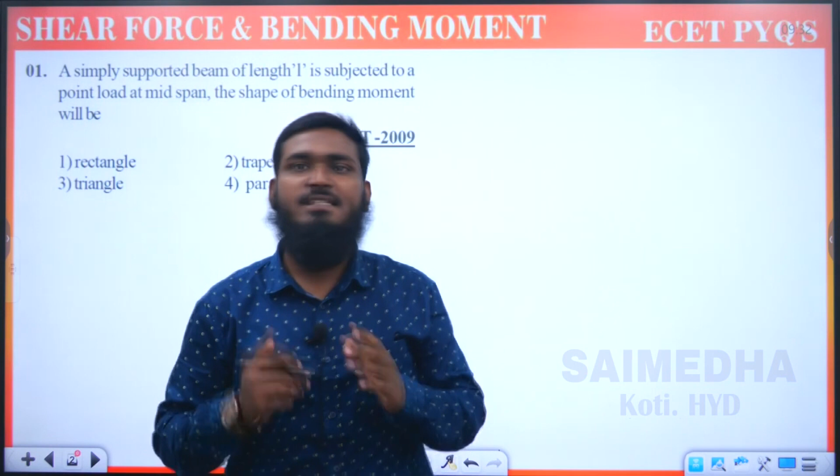In this video, we are going to discuss the previous ECET questions on the topic shear force and bending moment. This is the second chapter we have taken. Whatever questions have been asked till now in the ECET examinations on shear force and bending moment, we have to cover all these questions here.

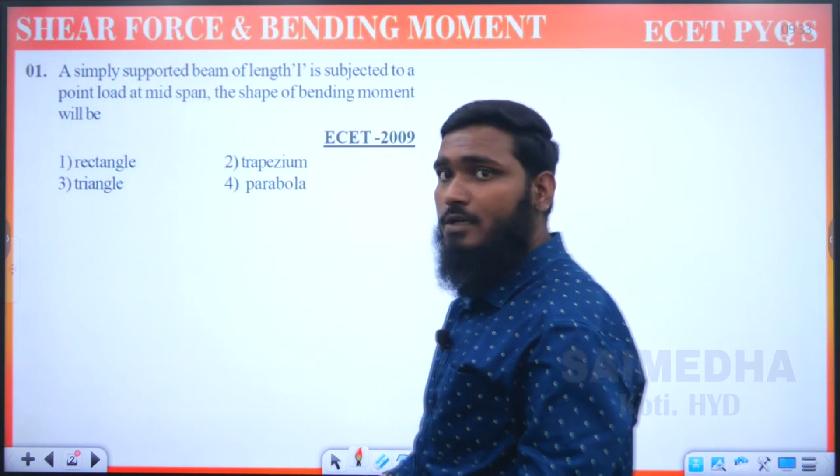Now let us see the first question. A simply supported beam of length L is subjected to a point load at mid span. The shape of the bending moment will be. Now let us see this part.

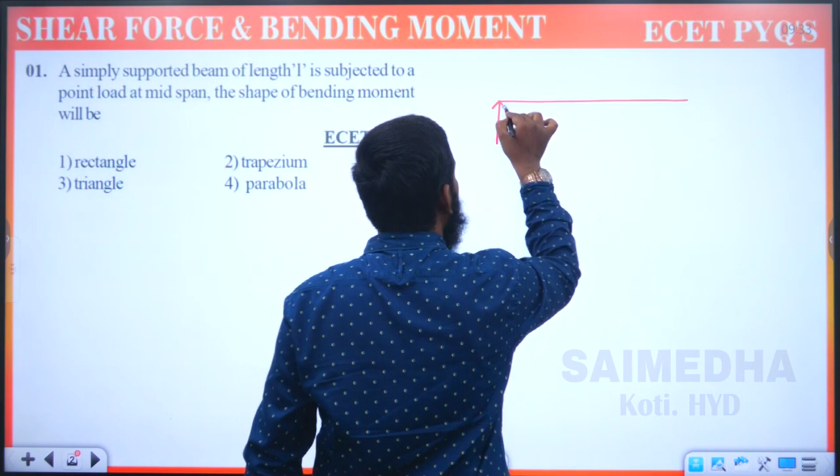What we are having first here is a simply supported beam. If you are taking a simply supported beam, let us take this part. This is the simply supported beam we have taken. What is the meaning of simply supported beam actually? Whenever the beam is having two supports at its ends, we are calling it a simply supported beam. So a simply supported beam of length L.

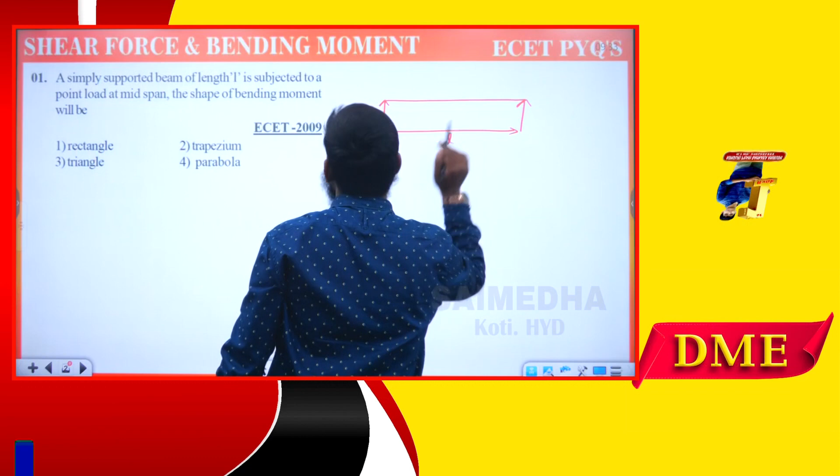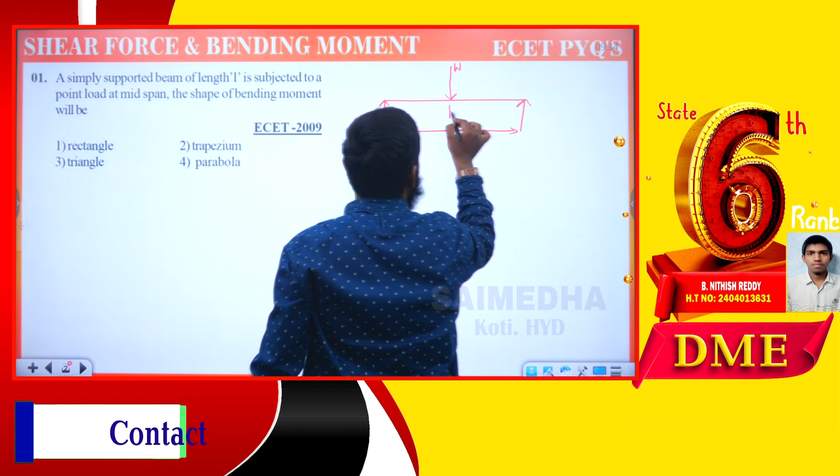So this complete length we have taken as L. It is subjected to a point load at mid span. So at the midpoint we are having the point load. Let us take it as a point load here and mention this as W. At mid span we have taken, mid span means this length we are taking as L by 2, and again this length we have taken as L by 2.

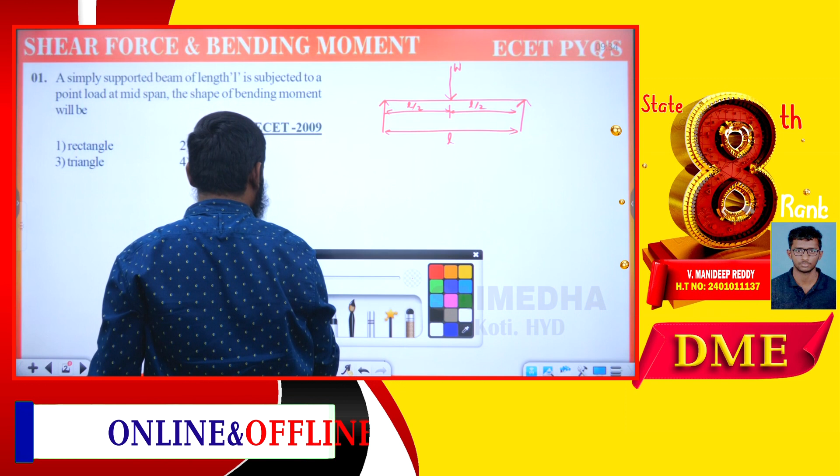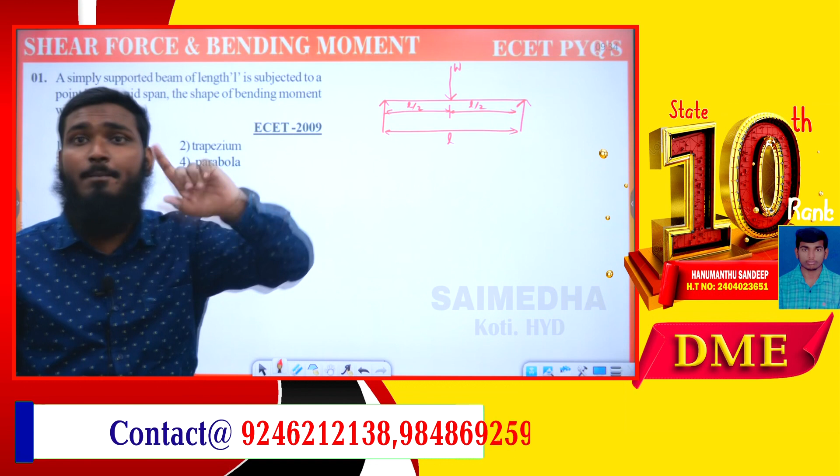Now let us see the next point: the shape of bending moment will be. So for these questions, these are standard questions actually. So compulsorily what you have to do is, I'll explain how we are getting that shape, but after that you have to remember directly what shapes we are getting for this part.

For standard conditions, if you take cantilever beam with point load, cantilever beam with UDL, cantilever beam with UVL - but maximum questions will be from point load and UDL itself. Similarly, simply supported beam whenever we have point load at mid span, and similarly simply supported beam with UDL. So these are the standard questions we are having. We have to directly remember the diagrams, how we are getting them.

Now let us see this part. This point load at the midpoint we have taken as W, and let us take this part as RA, and this is RB.

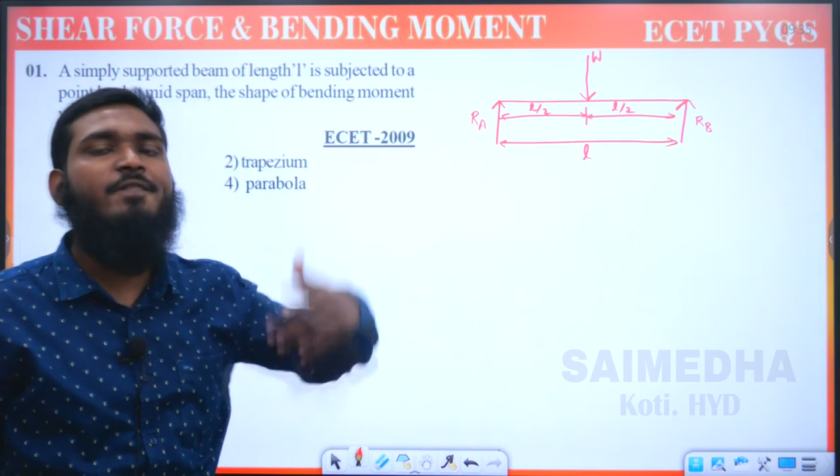Okay, so we are having the reactions over here. Whenever we are having the supports, what are we calling it? A reaction, RA, RB. Now first let us find out what is RA value and RB value, then we have to go for shear force and bending moment. So first, what we are taking over here, our first step is...

Now whatever forces we are having over here, algebraic sum of all the forces equals to zero. So we are taking this part: upward forces equals to downward forces.

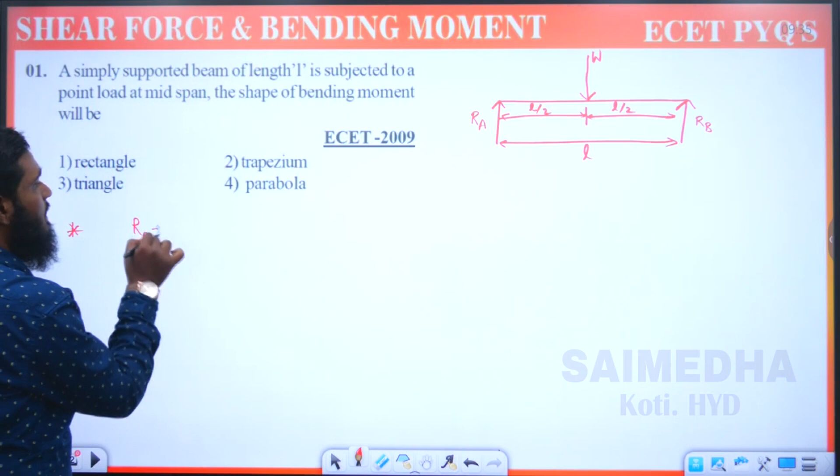So what we are having, RA, RB we can take over here, and W we can take. So the first condition we are taking is RA plus RB equals to W. This is the first equation we are making over here.

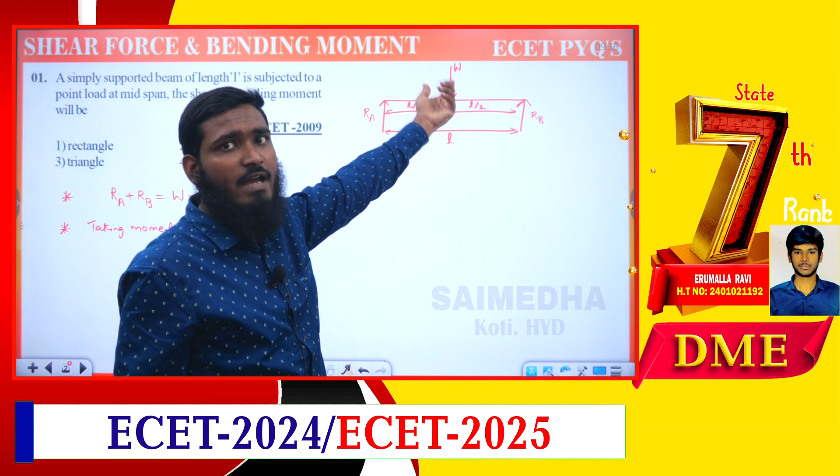Now next, what we are taking is moments. We are taking moments at point A. So whenever we are taking moments at point A over here, moment means what? Force means load, whatever we are having, force or load, and we have to take the perpendicular distance. Like that we have to calculate over here.

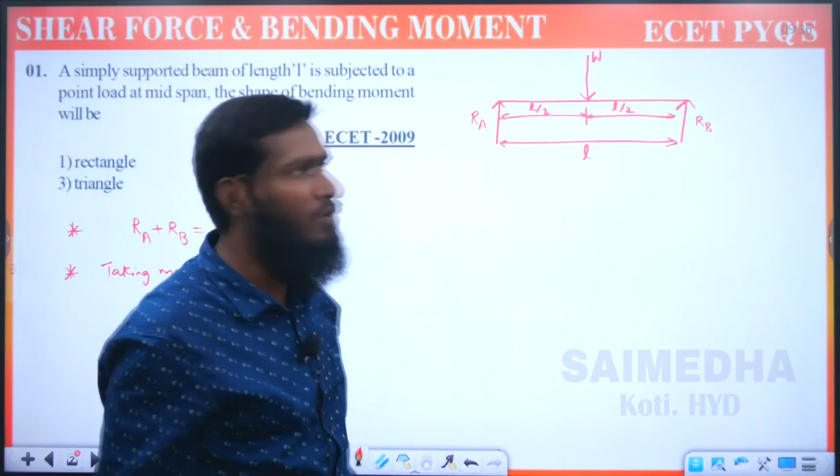So whenever we are taking this point, now we have to take clockwise moments and anti-clockwise moments. So what is clockwise and what is anti-clockwise moments over here? If you are taking this point over here and we are taking this reaction, it is looking like what? Clockwise or anti-clockwise? This is becoming clockwise, and this part it is becoming anti-clockwise.

So now let us take this part as clockwise moments, it equals to anti-clockwise moments. So we are taking this part as RB into, this is the force, load we have taken. What is the perpendicular distance we are having up to point A? L. So RB into L, which is equals to...

Now next we have to take this part, clockwise we have to take over here. So W we are having, and the distance we are having up to point A is L by 2. So let us take this part as W into L by 2.

Now what will happen? This L gets cancelled. What is the RB value we are getting over here? RB is equals to W by 2. So RB value is equals to W by 2.

Now with the help of this RB value we can find out the RA value also. So if you are substituting, RA plus RB equals W, sending RB over there means minus RB, which is W by 2. So RA equals W minus W by 2, which gives RA equals W by 2.

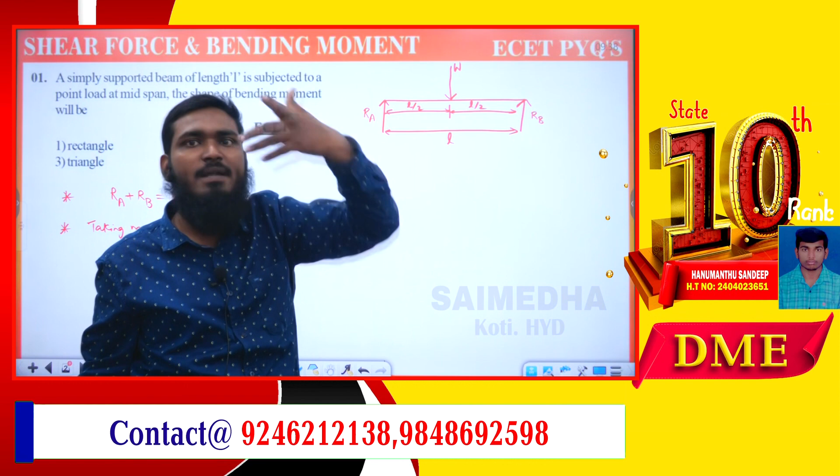What is the shortcut we are having? Whenever we are having symmetrical loading, meaning the point load is acting at the middle of that part, mid span, so whenever it is acting at mid span, what we can do is directly take this part.

RA is equals to, what is the load we are having over here? Load is equal to W. So W by 2, and RB is equals to W by 2. Directly we can write over there, no need to go for all these calculations. Whenever we are having this point load, whatever the value will be, that value we have to divide by 2 to get the RA value and RB value.

Okay, so this part is completed. Now after this, what we have to do is find out shear force and bending moment values. What we have to calculate is shear force values and bending moment values. So first let us go for shear force over here.

So first let us go for shear force. Now shear force means, how many points are we having over here? Point A, point B, and let us take this part as C. So A, B, C, 3 points we are having. First let us go with the shear force at point B.

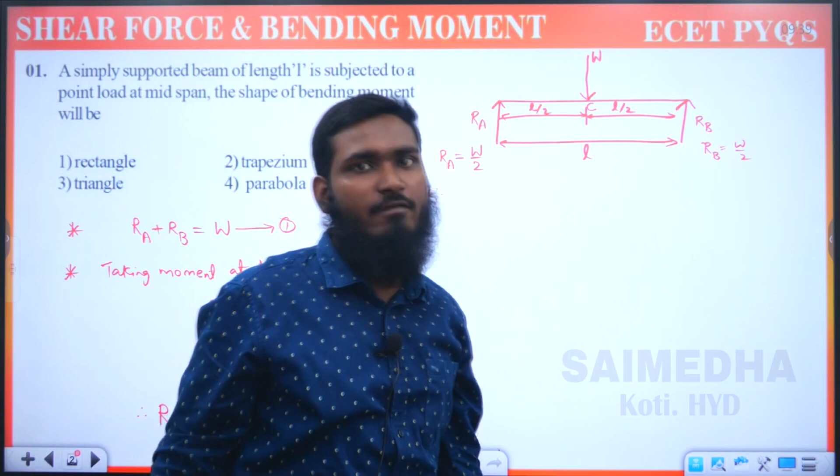Now for shear force and bending moment, we are having some sign conventions. So what is happening, listen here carefully.

Whenever we are having this part, this is a beam we have taken, and we are having this load. So whenever we are considering that load, suppose you want to find out the shear force at this load, what we have to do is draw the imaginary line after this. So if you are drawing this imaginary line, we have to check which quadrant this load is lying under - quadrant 1, quadrant 2, quadrant 3, or quadrant 4.

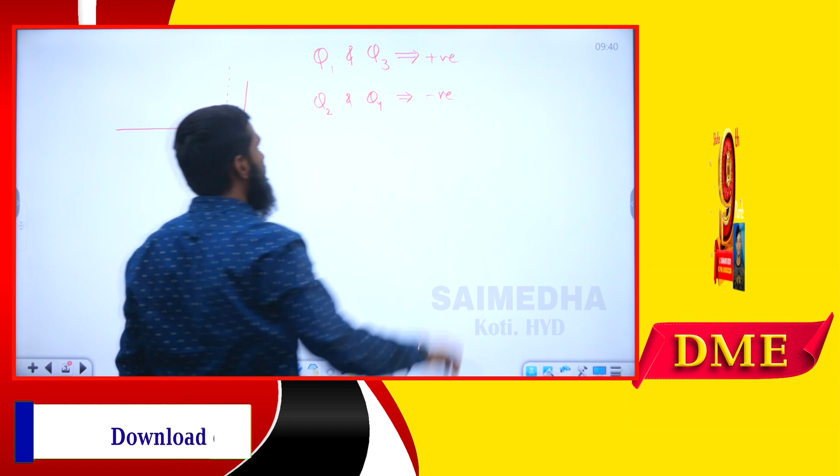So after finding that, if that point load or whatever load we are having is lying under quadrant 1 and quadrant 3, then we have to take it as positive. Now similarly, if it is lying under quadrant 2 and quadrant 4, then we have to take it as negative. Quadrant 1, quadrant 3 we have taken as positive, quadrant 2 and quadrant 4 we have taken as negative. So this is the sign convention for shear force.

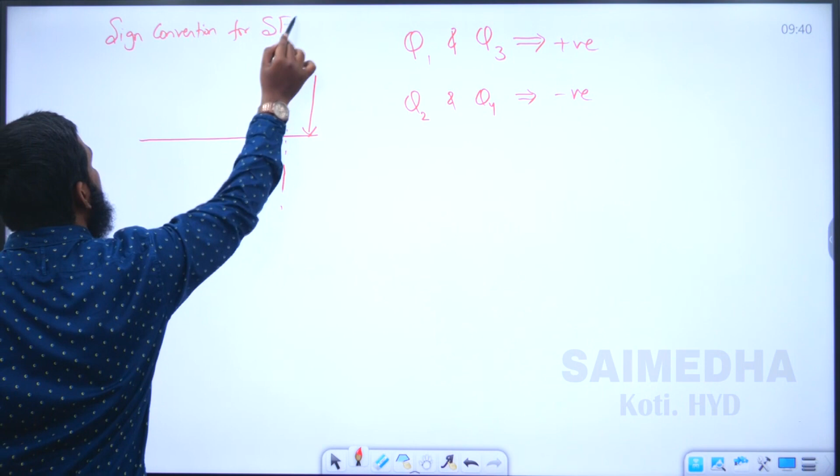Similarly, we are having a sign convention for bending moment also. Okay, now listen here carefully, what we have to do now.

Suppose this is a beam we are having, and if the loads are acting in the upward direction, so whenever we are having the loads in the upward direction over here, it will be looking like this part. If you want to remember, we are remembering this part as a smiley face - it is looking like a smiley.

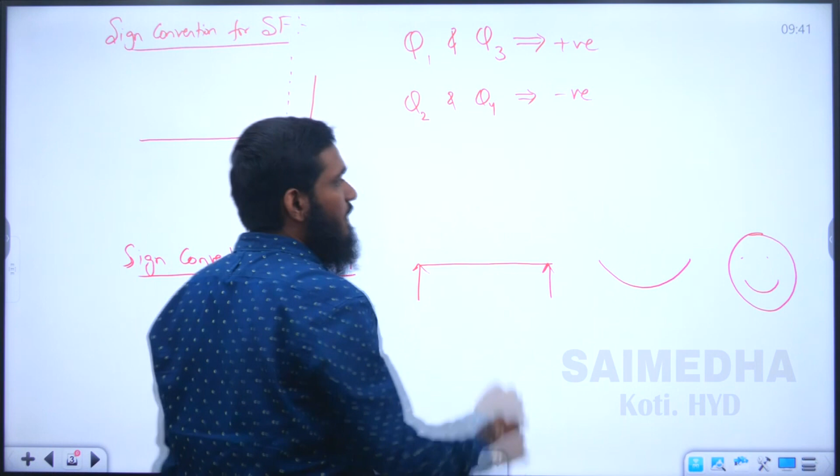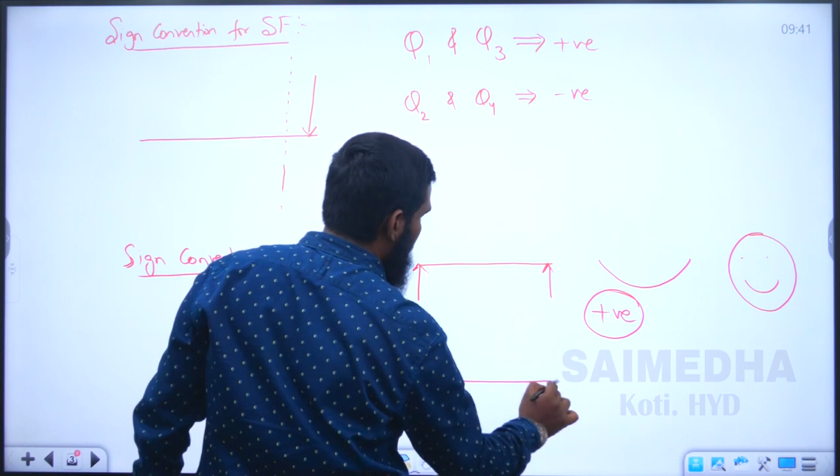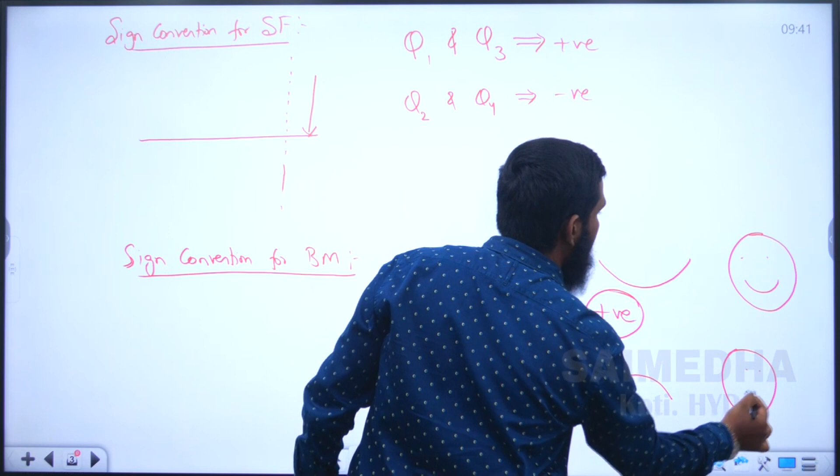So whenever we are having this part, we have to consider this as positive, and this we are calling it sagging. Now whenever we are having the load in the downward direction, it will be looking like somewhat a sad face over here. So whenever we are having the sad face, we have to remember it as negative. So this is positive and this one is negative - we have taken sagging and hogging. So these are the sign conventions we are having over here.

By using the sign conventions, let us apply this part. So for shear force, if you are considering this load and drawing the imaginary line over here, this load - it is coming under which quadrant? Quadrant 1, quadrant 2, quadrant 3, quadrant 4. It is lying under quadrant 4 over here. Quadrant 4 means we have to take minus. And what is this load value we are having? This load reaction means W by 2. So shear force at point B we have taken it as minus W by 2.

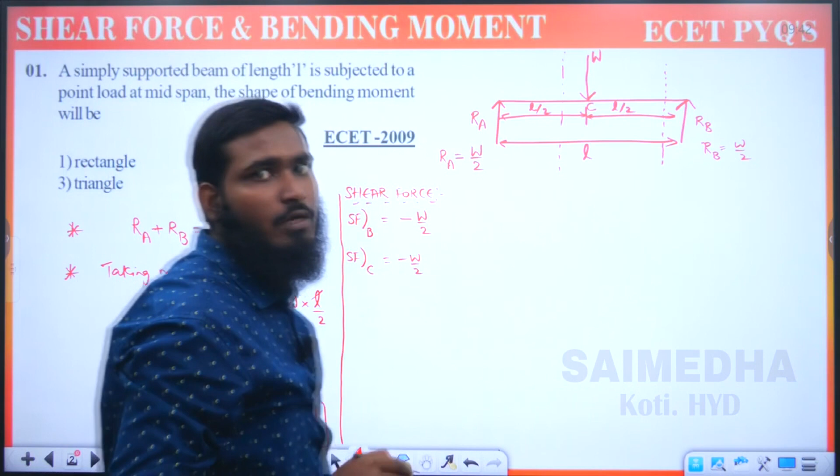Now similarly, shear force at point C we have taken. So for shear force at point C, first we have taken this part, so directly we are writing minus W by 2. Now we have to take this load also. If you are taking this load, now we have taken the imaginary line over here, so this load is coming under quadrant 1. If it is coming under quadrant 1, we have to take it as positive. What is the value we are having? W. So it equals plus W minus W by 2, which equals W by 2.

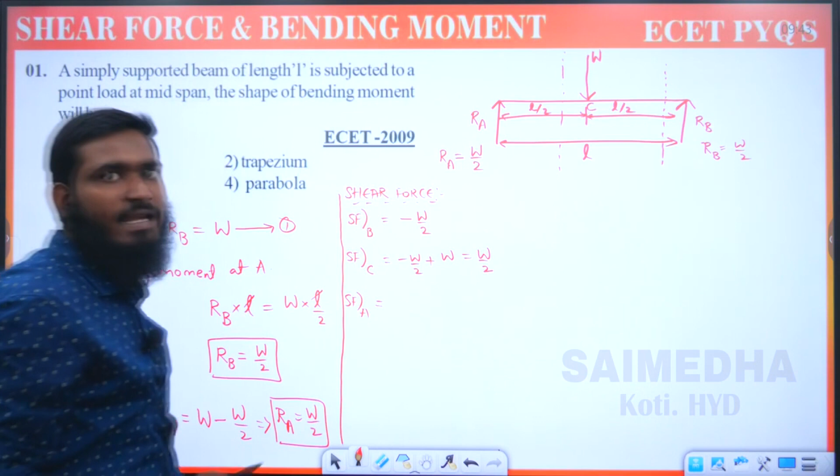Shear force at point B and shear force at point C we have calculated. Now we have to calculate shear force at point A. No need to calculate it separately for a simply supported beam. Listen carefully: shear force at point A is equal to the RA value. Whenever discussing a simply supported beam problem, remember shear force at point A equals RA. What is RA value here? W by 2. So the shear force values are completed.

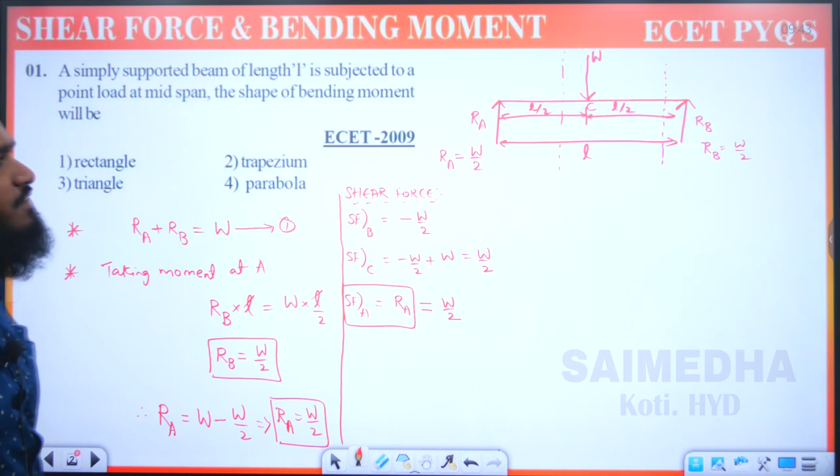Now let us go with the bending moment values. We are trying to calculate bending moment. First let us go with bending moment at point B.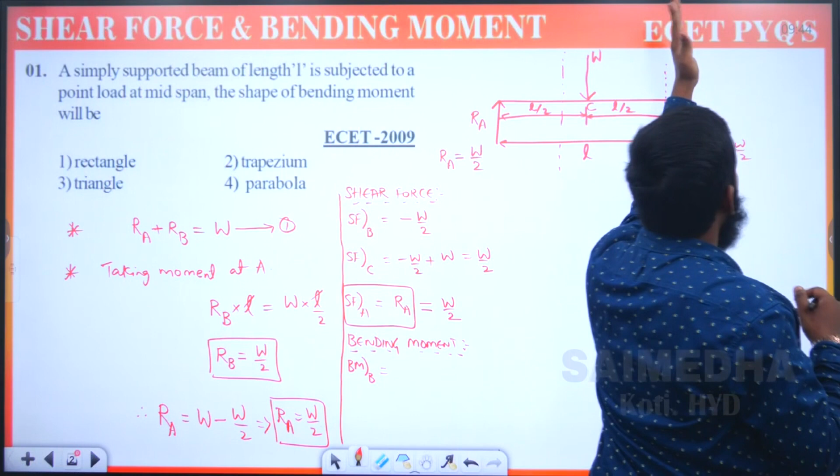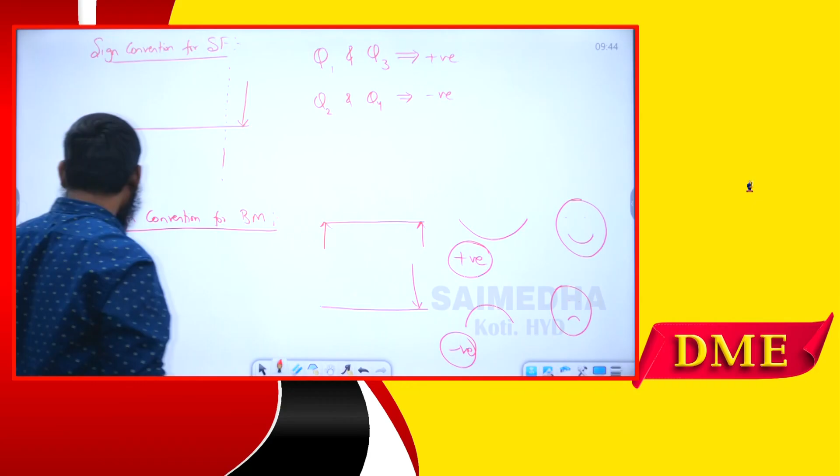For this bending moment, the formula is force into perpendicular distance. Load is W by 2. But what is the perpendicular distance we are having? For this point we are not having any perpendicular distance, so distance will be 0. If you take this part, it looks like a smiley face, so we take it as positive. So we have W by 2 into 0, which equals 0. Bending moment at point B is equal to 0.

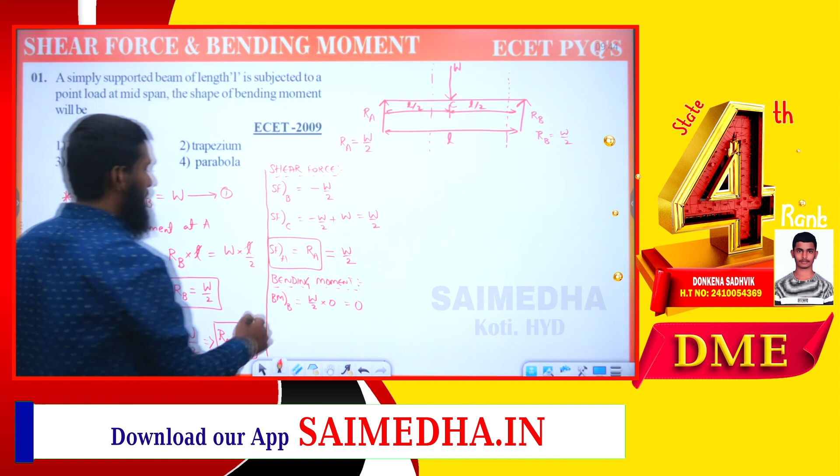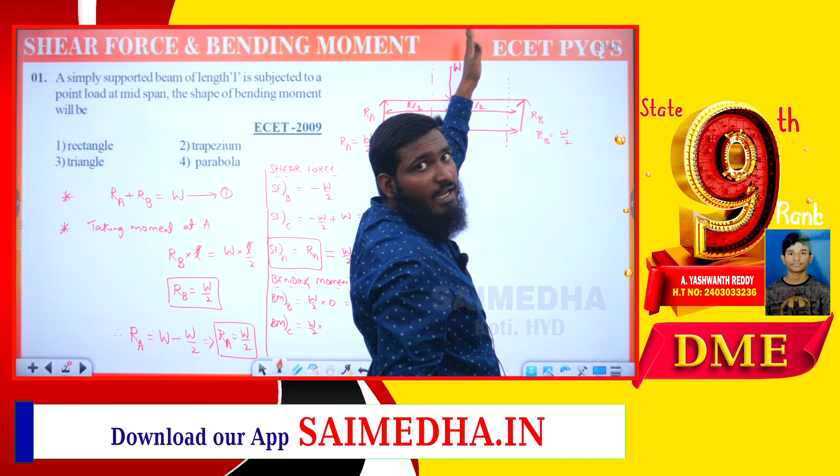Next, bending moment at point C. Again taking this part, it becomes plus W by 2 because it is a smiley face, into the load, and what is the perpendicular distance up to point C? Don't make a mistake, we take distance only up to point C, which is L by 2. So this part becomes W by 2 into L by 2. Next, if we take this other part, it becomes a sad face, so we take it as minus W. We are not having any distance here, so it is 0. So this part becomes 0, and the overall result becomes WL by 4.

Next, the last bending moment value: bending moment at point A. We have to calculate up to this point. We take plus W by 2 into, and up to point A the length is L, so this part becomes W by 2 into L. Next, for this load, since it is in a downward sad face, we take it as minus, load is W, and up to point A the length is L by 2, so we take L by 2. For this load we are not having any perpendicular distance, so it becomes 0. So it equals WL by 2 minus WL by 2, which is 0.

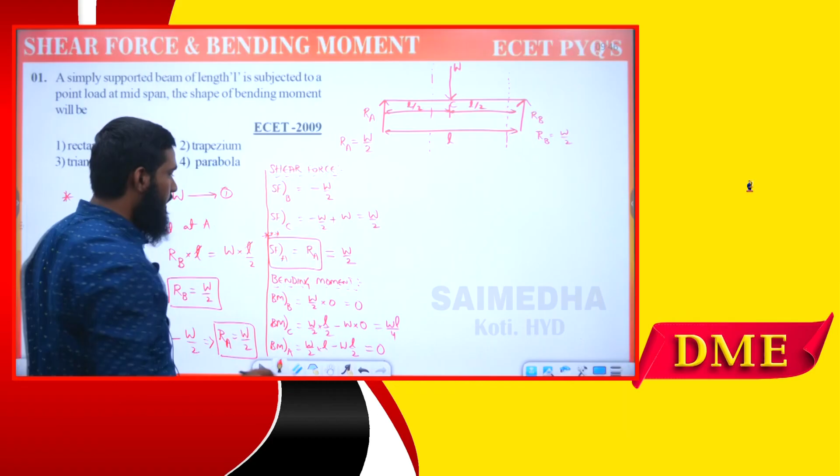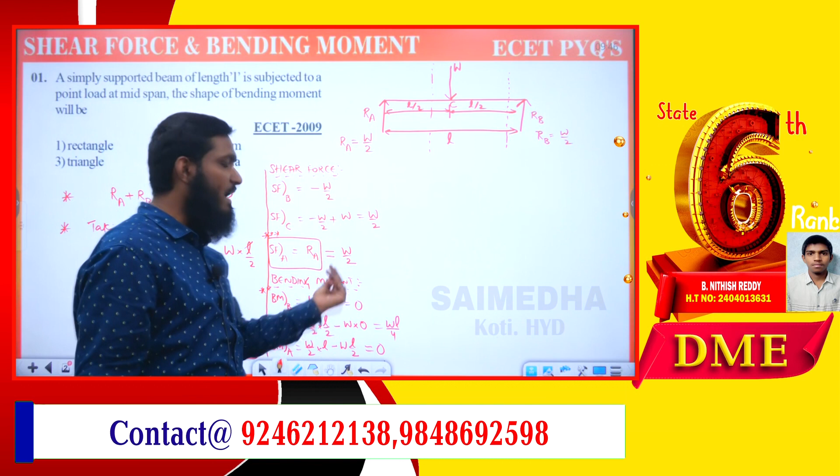So we have to remember one important point for a simply supported beam: shear force at point A equals RA, and bending moment at the two end supports — bending moment at point B and bending moment at point A — will always be 0. No need to calculate, directly remember the answer as 0. So this was all about RA value, RB value, shear force values, and bending moment values, all calculated.

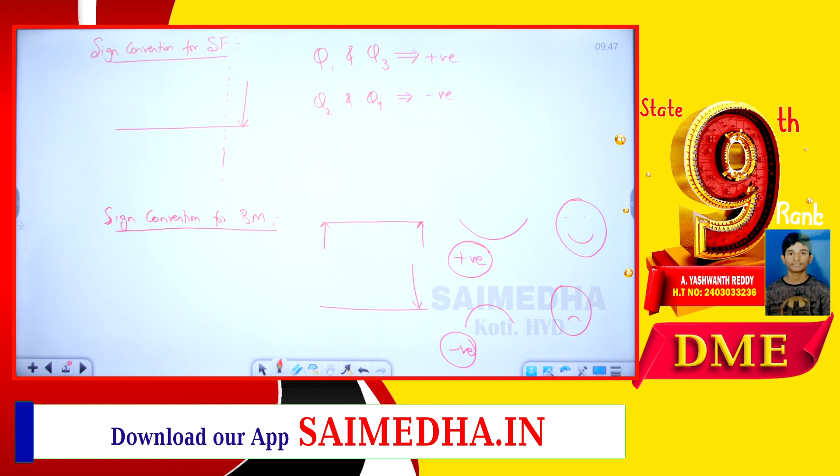Now let us try to draw the diagram. For drawing the diagram, listen carefully, we have to remember some points. So first we are taking the type of loading.

Now similarly, if you are having no load condition in some region, if you are not having any load, then what do we have to do? For shear force we have to take a horizontal line, and for bending moment we have to take an inclined line.

Now let us go for UDL, uniformly distributed load. If you are going for UDL, for shear force we have to take an inclined line, and for bending moment we have to take a parabolic shape. It will be shaped like a parabola.

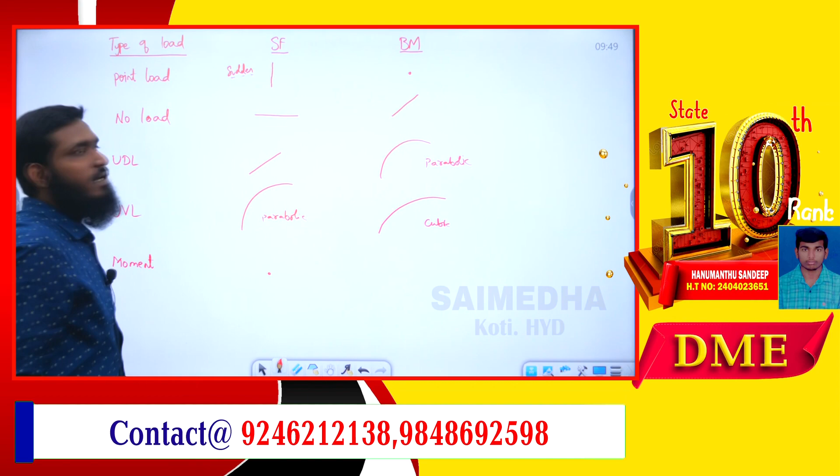Now next, after UVL, if you are taking a moment, concentrated moment, what we are doing is we are taking the point for shear force, and for bending moment we are taking the vertical line. So these are the most important conditions we are having for the diagrams.

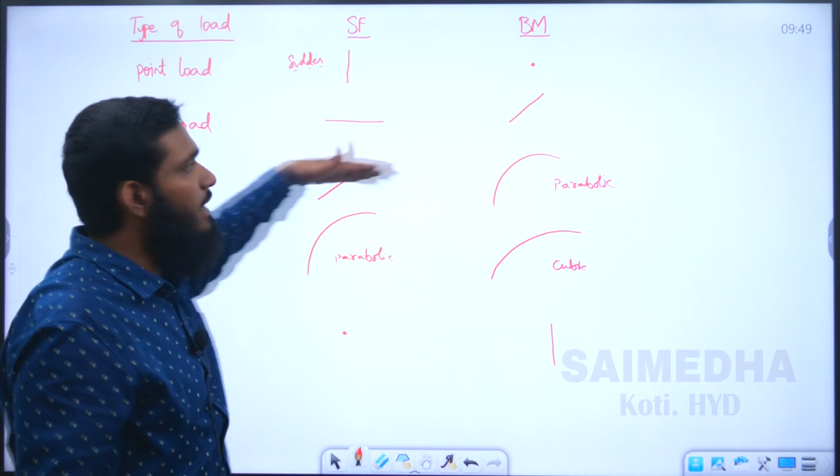We have to remember this part compulsorily. So point load means vertical line, bending moment point, no load horizontal line and inclined line, UDL inclined line and parabolic, then UVL parabolic and cubical, moment means point and vertical line. Now by using these conditions, let us try to draw the diagram of the shear force and bending moment.

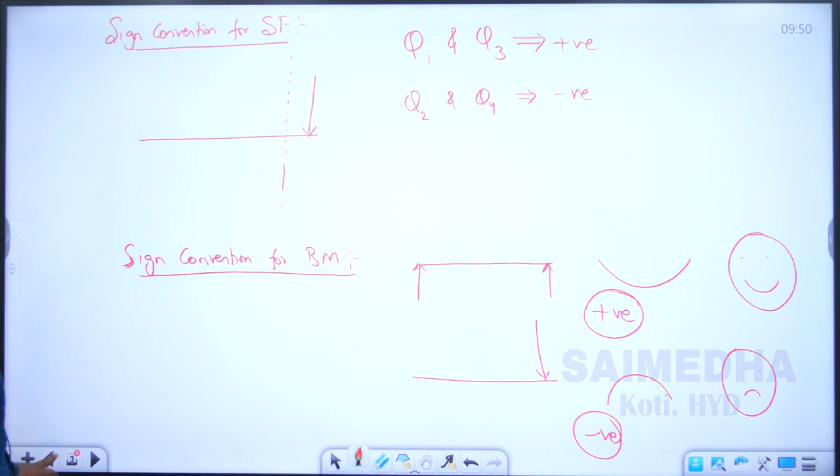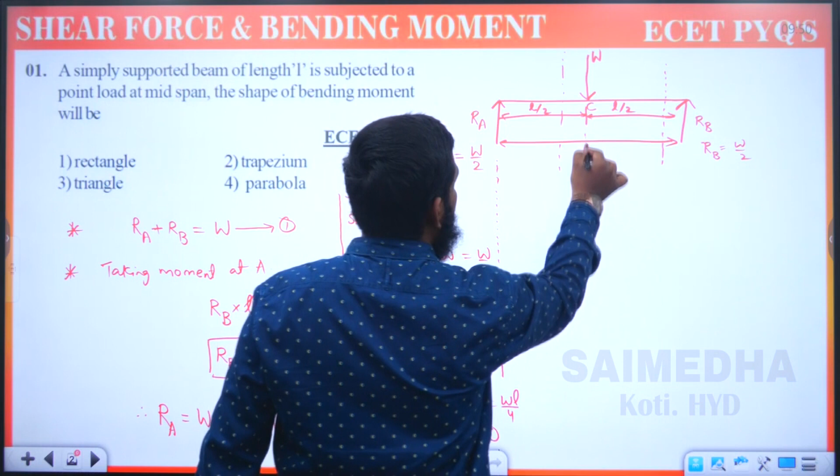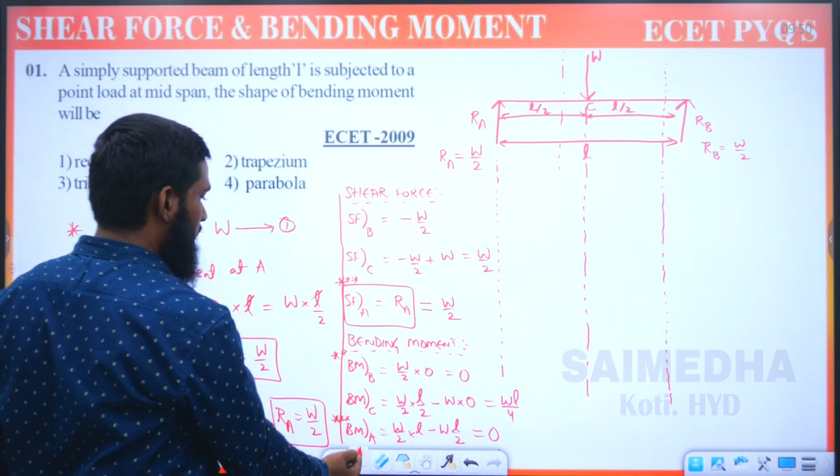Now let us see this part over here. First let us try to draw the shear force diagram. So now whenever we are drawing the shear force diagram over here.

Now what is the shear force at B we are getting over here? Shear force at B is minus W by 2, meaning we are taking the negative part, and for point load we have to take a vertical line. So minus W by 2 means we have taken a vertical line like this.

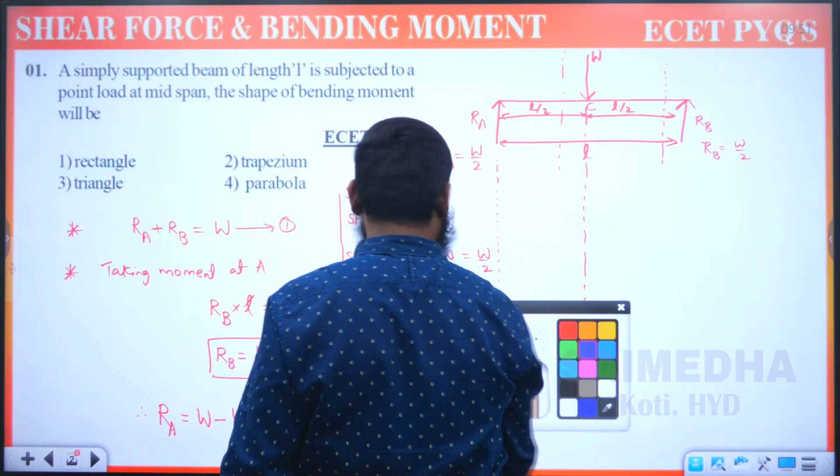Now we are not having any load between this region. So let us take the line over here, we are taking the line as this part.

Now let us draw the shear force diagram. For the shear force diagram we have taken this part. Now what is the shear force at point B? We are having minus W by 2, minus W by 2, and for point load we have a vertical line, so we have taken this part as a vertical line, and this is minus W by 2.

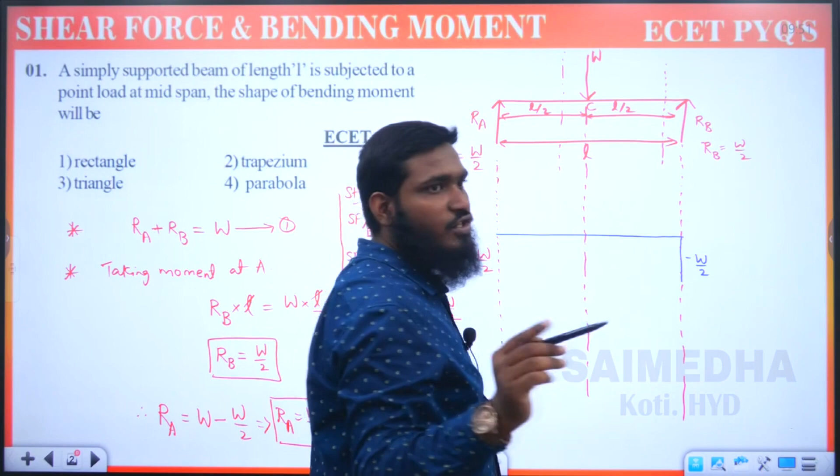We are not having any load between this. If you are not having any load, for shear force what we have to take is a horizontal line. Up to this we have taken a horizontal line over here.

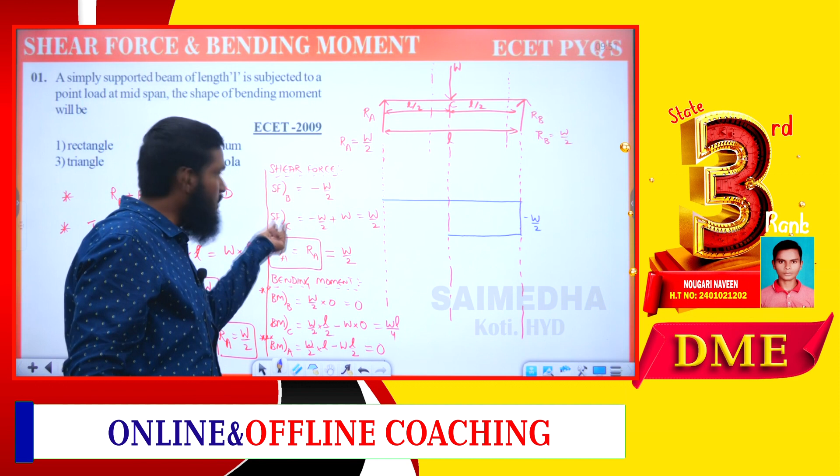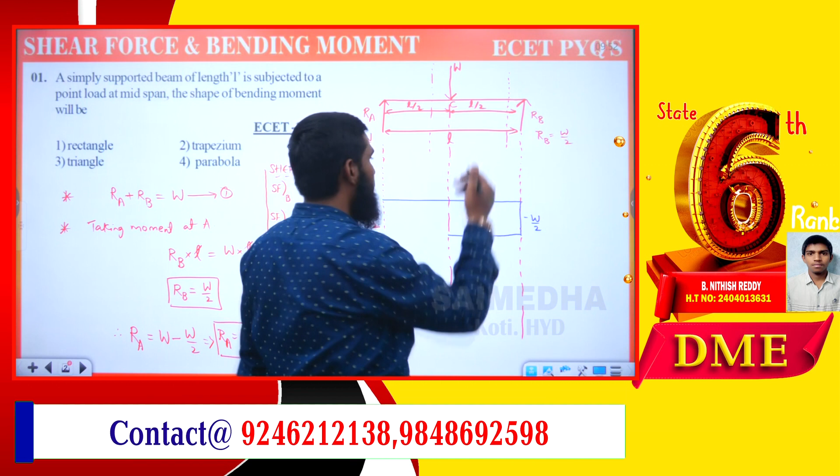Next, shear force at point C. If you are taking shear force at point C, what value do we get? W by 2. So we are getting the final answer as W by 2. W by 2 means a positive, so let us take it as positive. Again we are having a point load, so we have to take a vertical line over here, and for this vertical line we have taken it as W by 2.

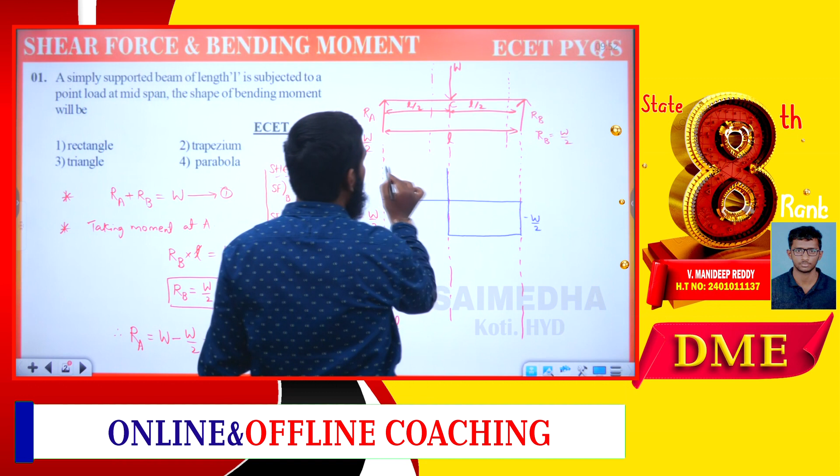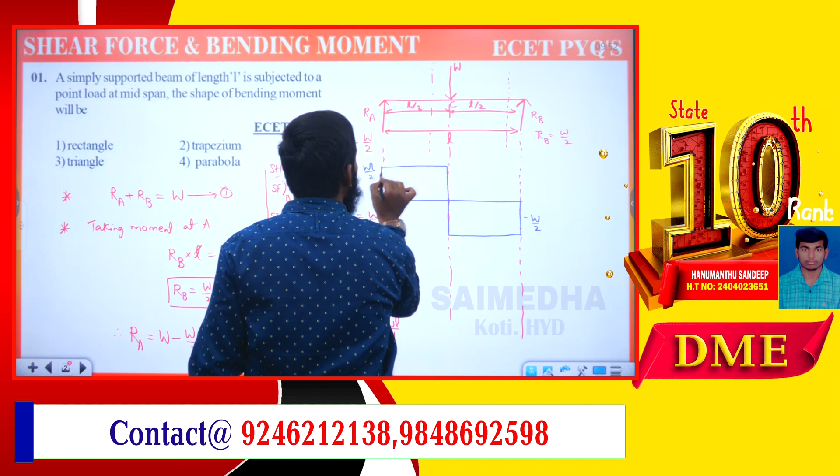Then again we are not having any load. If you are having no load, what we have to take is a horizontal line. After taking the horizontal line, we take this part. So this is becoming plus W by 2, this is the positive part we are getting, and this is the negative part we are getting. So this was the shear force diagram, completed.

Now let us draw the bending moment diagram. Bending moment at point B is 0, and bending moment at point A is also 0. For point loads also, what we have to take? We have to take a point only for bending moment.

Now bending moment at point C. What do we get? WL by 4. So at this point we are getting WL by 4, and this part we have taken as WL by 4.

Now we are not having any load over here. If you are not having any load, for no-load conditions what we have taken for bending moment is an inclined line. Similarly, over here we take an inclined line, and over here also an inclined line. So this is the bending moment diagram. This was a standard question, that's why I explained the complete part over here.

Now from this question only, similar questions will keep repeating, so directly we can give the answers over here. Now let us check the first question we are having.

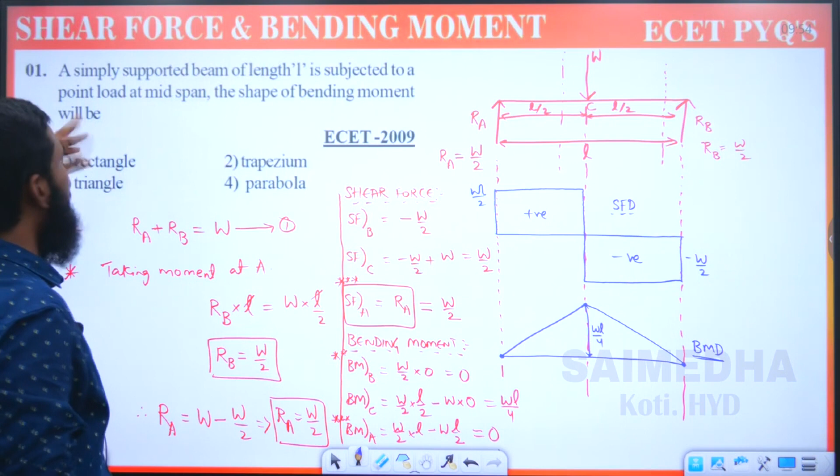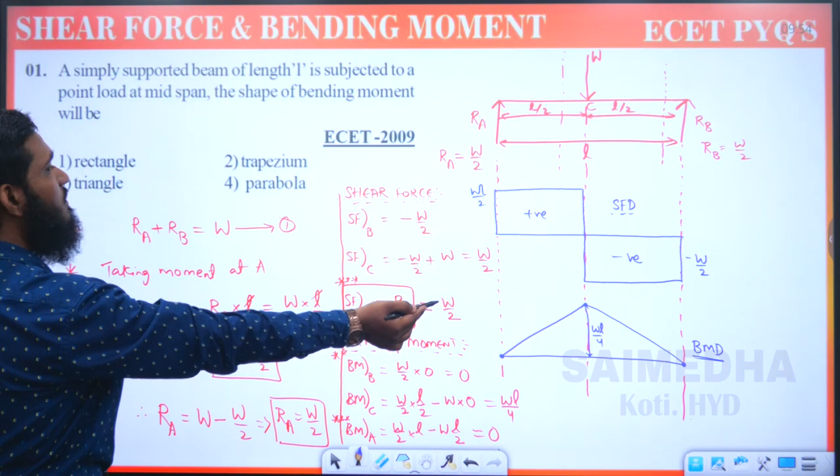A simply supported beam of length L is subjected to a point load at mid span. The shape of the bending moment diagram will be - rectangle, trapezium, triangle or parabola? So we only have to remember the shape of the bending moment we get. It is looking like a triangle. So no need to solve this question fully.

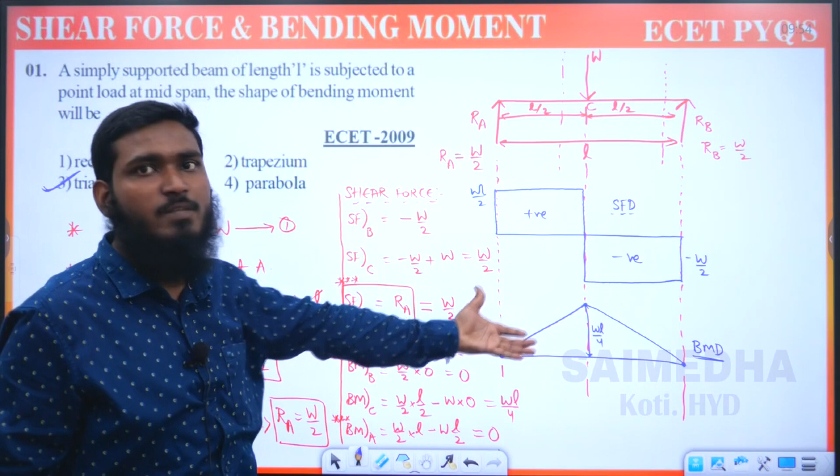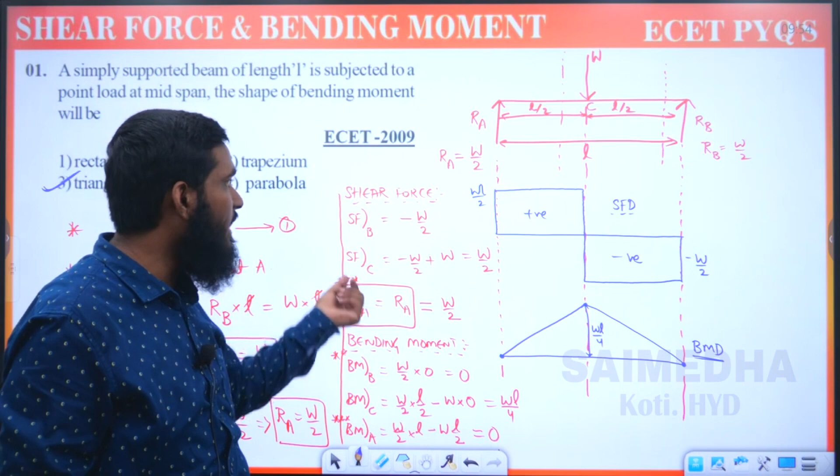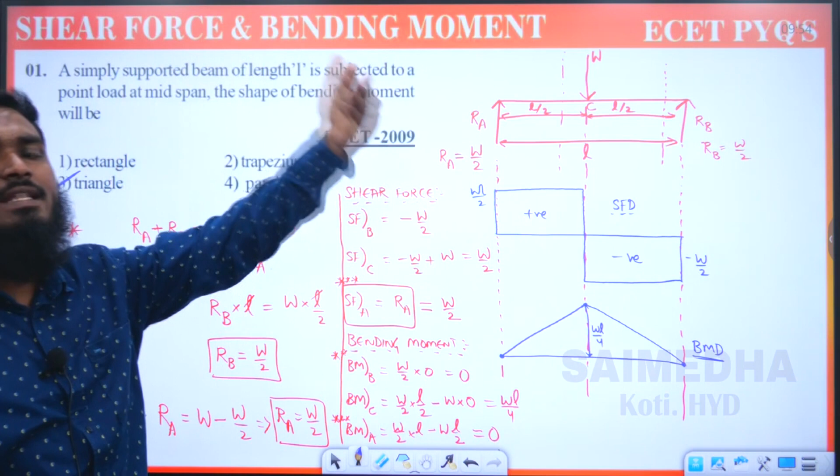Only by remembering how the diagrams look, where we get the bending moment, what is the bending moment at point B, what is the bending moment at point A, what is the maximum bending moment, what is the shear force at point A, what is the shear force at point B - if we remember the answers directly, we can write them directly in the examination. So no need to discuss all this concept again. For the first question I explained this much. Whenever we get similar questions, we will directly give the answers. So option 3 is correct.

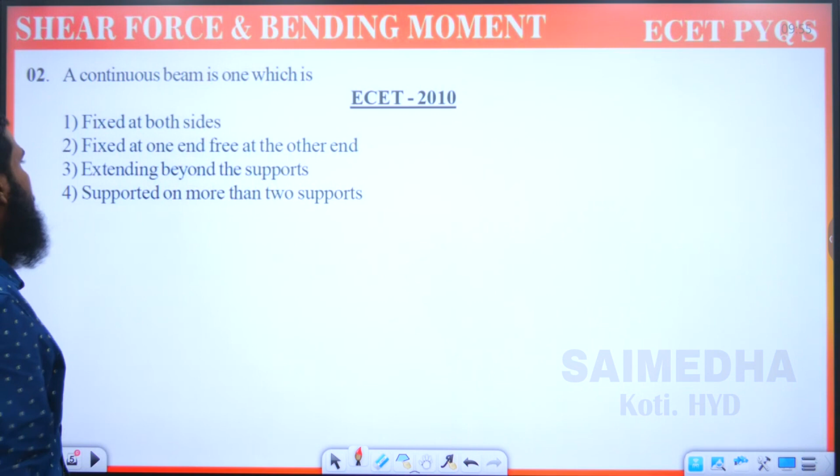Now let us go to the next question. A continuous beam is one which is fixed at both sides, fixed at one end and free at the other end, extending beyond the supports, or supported on more than 2 supports. Now, for continuous beam, let us discuss some different types of beams we have. First, cantilever beam - if you are going with cantilever beam, what is the meaning of this part?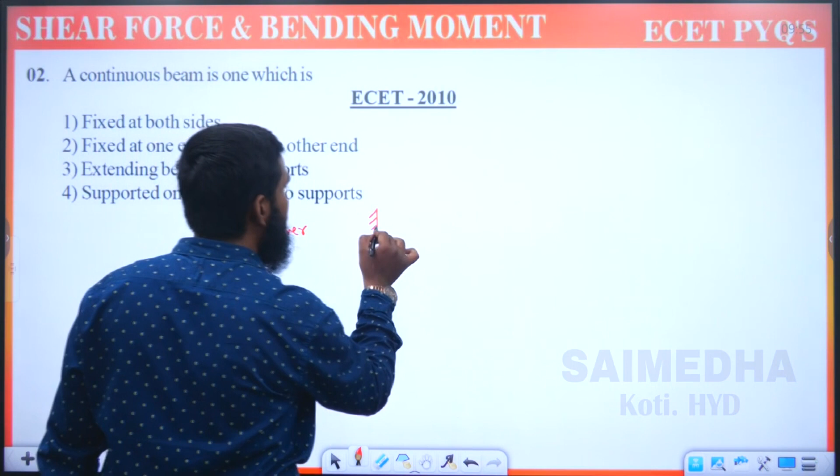So we are having one end fixed and the other end free. Whenever one end is fixed and the other end is free, that beam we are calling a cantilever beam.

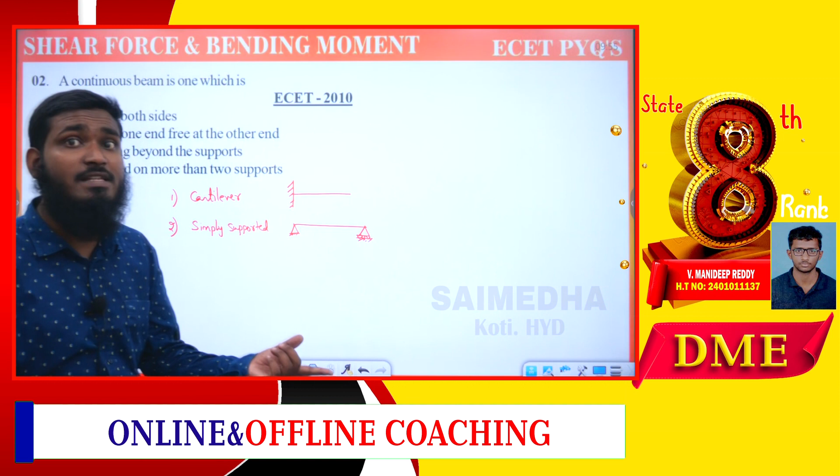Next we are going with simply supported beam. Suppose we have taken this beam, in this beam we are having two ends, and for these two ends we are having one support at each end. Whenever we are having supports at the ends, we are calling it simply supported.

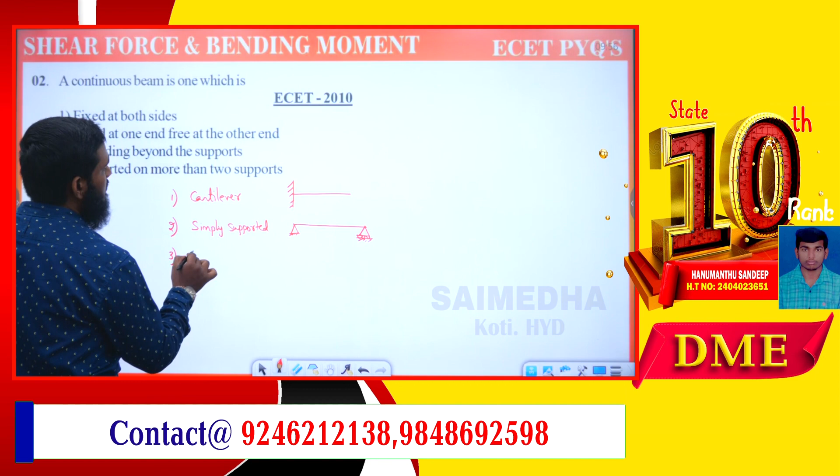Next, third type, we are taking fixed beam. If you are taking fixed beam means the beam is fixed at both ends.

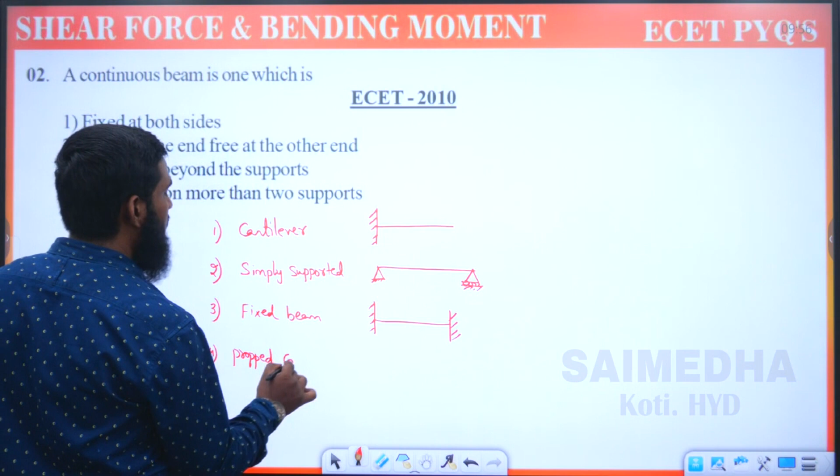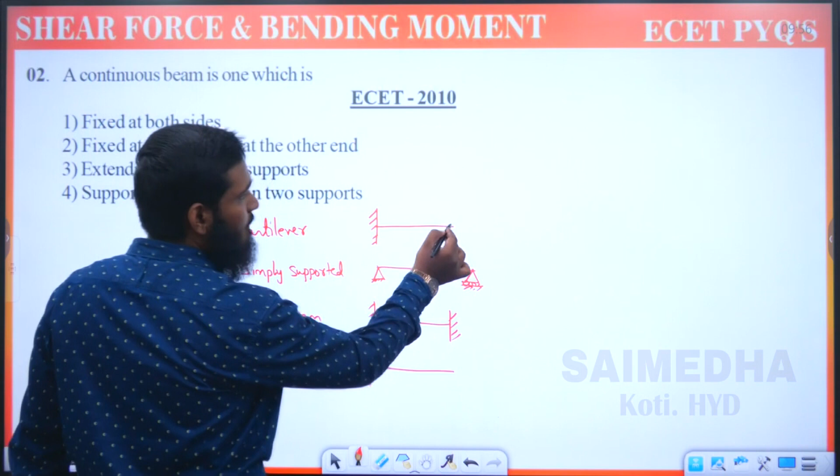Now we are taking propped cantilever. It is similar to cantilever only, fixed at one end, and the other end which would be free is now supported. So whenever one end is fixed and the other end is supported, we are calling it propped cantilever.

Next, similarly we are having overhanging beams. First we take single overhanging beam. This is a beam we have taken, one support is at the end point only, but another support is apart from the end, at some distance from the end. That part we are calling single overhanging.

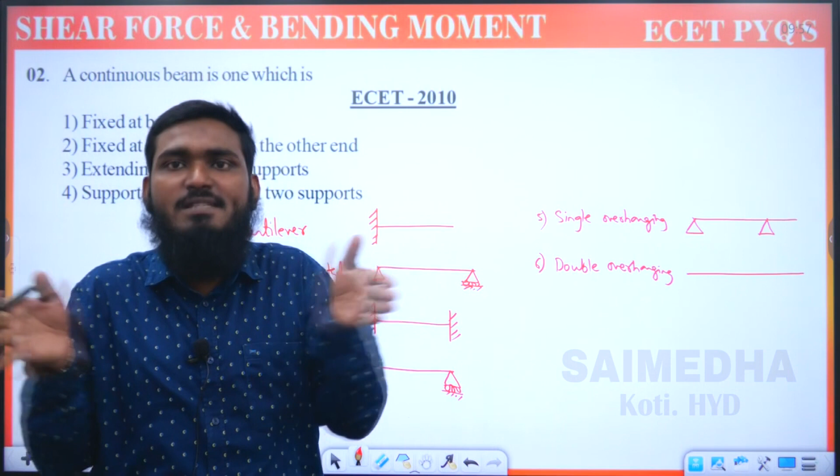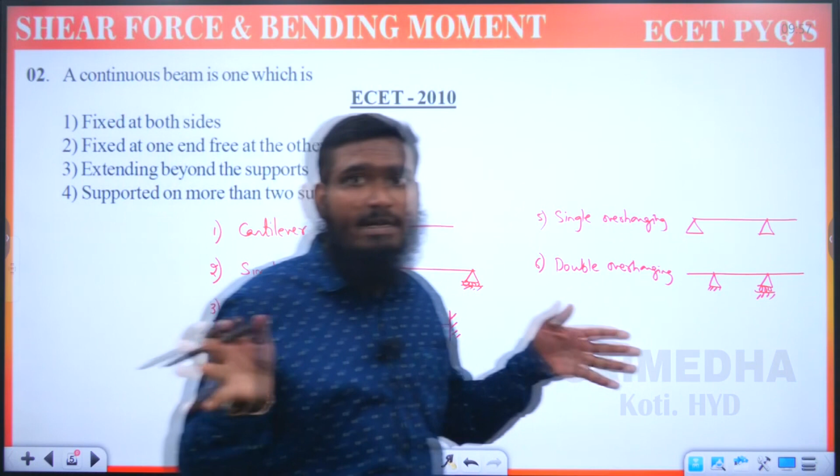Next we are having double overhanging. Double overhanging means the supports are not at the end points, but apart from them, at some distance from the end points. One support here and another support there, neither at the end points - that we are calling double overhanging. Single means only one support is away from the end point, double means two supports are away from the end points.

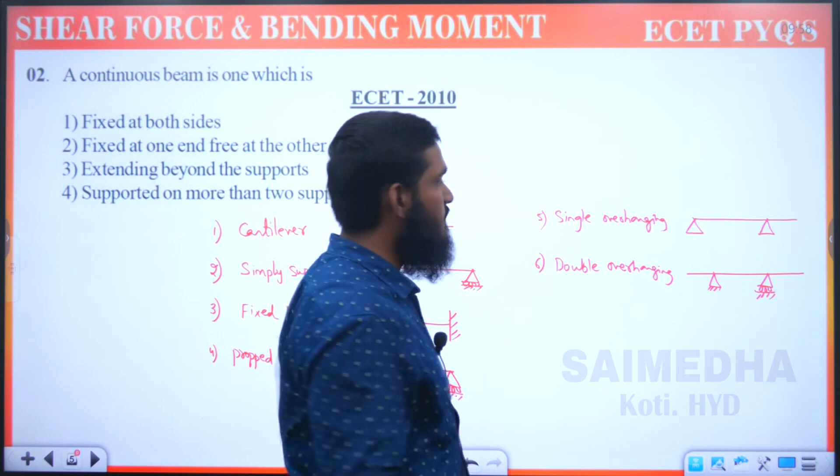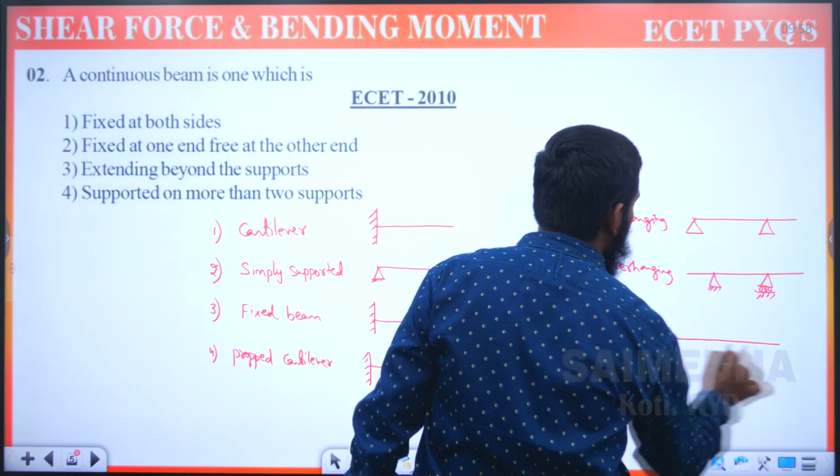Next we are having continuous beam. Continuous beam means whenever a beam has more than two supports, we are calling it a continuous beam. Let us check the options: continuous beam is one which is fixed at both sides, fixed at one end and free at other end, extending beyond the supports, or supported on more than two supports.